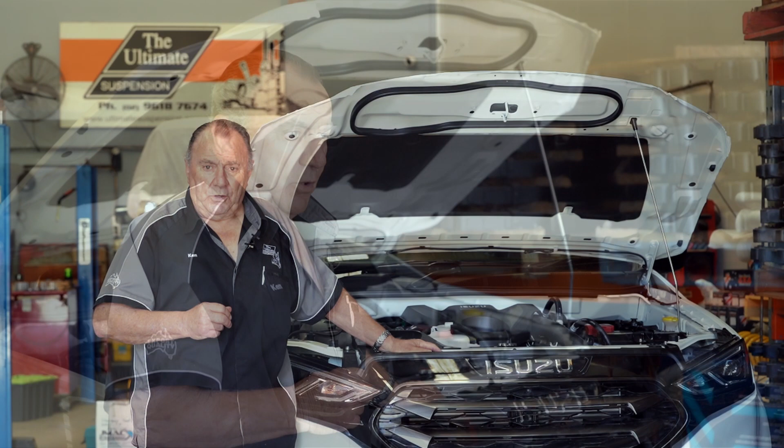Today we're going to introduce you to the R&D steps to build a prototype intercooler for the new D-MAX and MU-X four-wheel drive. We're working closely with HDi top engineering design crew, and we'll take you through step by step, right from the beginning, through the installation of the prototype and up to the finished job.

As with any product, the ultimate result depends on the following factors: number one, the design; number two, the materials; number three, the manufacturing process; number four, the R&D and testing.

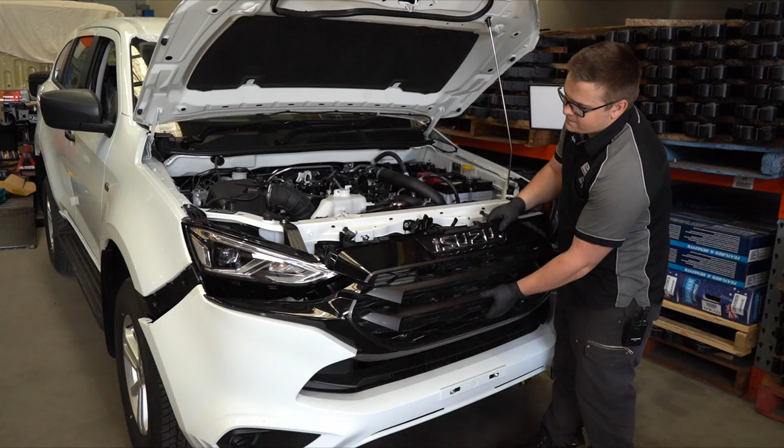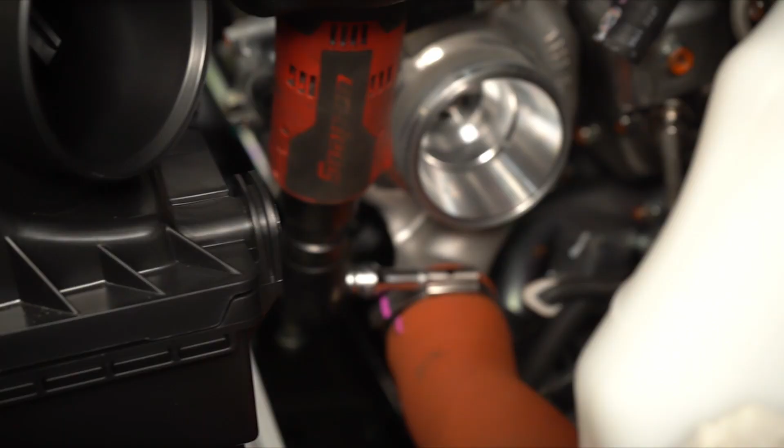With 25 years experience in the design of intercooler kits, HDi has the highest reputation for quality, design and performance. So it's no wonder HDi intercoolers are the first choice of any of those that are in the know.

The intercooler is so important, especially in countries with hot climates like Australia, where people are towing or carrying heavy loads. We build a heavy-duty suspension so they can carry the loads, and then we supply the intercooler that we know is going to work and keep the engine running smoothly.

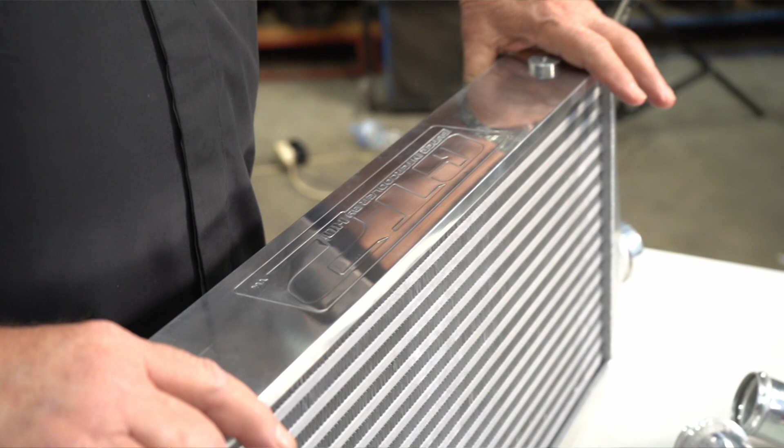Okay, this is the exciting part. As you can see by the quality of the product here, even down to the insignia on top, it's been pressed in by a 300-ton press.

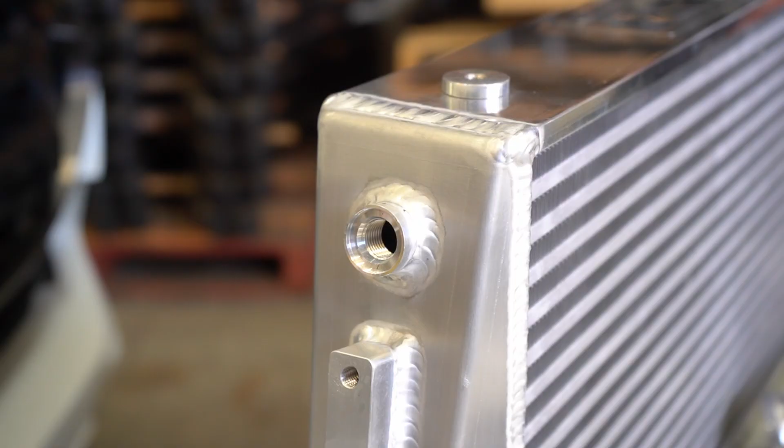The lightweight aluminium, the stainless steel brackets, we have special joiners, we have the HDi clamps. This will put together the full kit, and then we can do the fitting, and once fitted, we can then sign off and go into production.